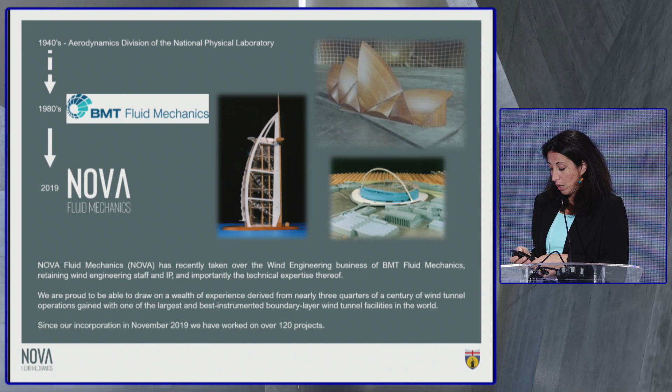...exist, but they deal with other aspects of engineering now. Together with two partners, I am one of the directors of Nova Fluid Mechanics. Since 2019, we have done 120 projects, and many of them are tall towers in Brazil. Hence why it's very important for me to be here today and talk about something that is very relevant to this country. So what do we do at Nova Fluid Mechanics?

Very briefly, we mainly deal with wind loading on civil structures. So all the civil structures that are considered very flexible, that can be tall buildings, long span bridges, stadia. We also work on offshore structures and renewables.

What I'm going to talk about today is wind climate. I'll give you before a brief introduction of why we are doing this research project and how it happens. Wind climate, wind loading in general for tall buildings. And then I will go into specifics of how we derive wind loads of tall buildings when we are in a thunderstorm-dominated region. And then I'll give you an overview of the research projects and what we want to do in the future.

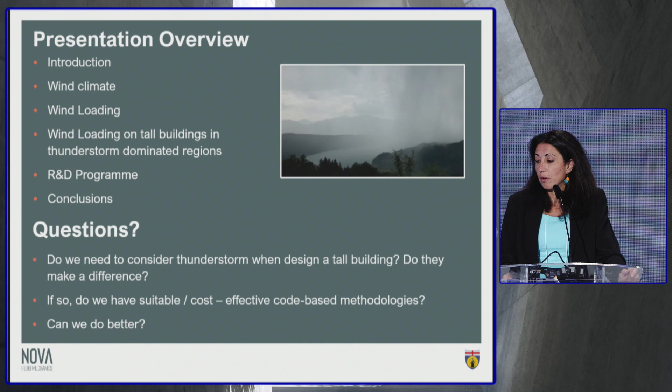This is one of my favorite videos of a thunderstorm, which clearly highlights the complexity and the beauty of this wind phenomenon. What I'm hoping to achieve today is provide you with not definitive answers, but a few things to think about and answer some of the questions. Such as, do we need to consider thunderstorms when we design a tall building? Do they make a difference? And if so, do we have a suitable, cost-effective, code-based methodology to do so? And most importantly, can we do better?

I was very pleased to hear the other presentations today, both Sergio and Roberto, because indirectly or directly, they both mentioned that the codes, the standards that we use as engineers are not necessarily suitable for the world of today's engineering. And it's very important that in the commercial world, obviously not part of a university, we keep on asking ourselves the question, can we do better, and try to work with universities and research centers to improve the ways that we have for designing structures.

So, what is wind engineering? I would like to provide a definition simply because not all the civil structures or concrete structures need detailed wind engineering studies. One of my favorite definitions, by one of the greatest wind engineers to me, Jack Cermak, is that wind engineering is best defined as the rational treatment of the interaction between wind in the atmospheric boundary layer and human beings and their work on the surface of Earth.

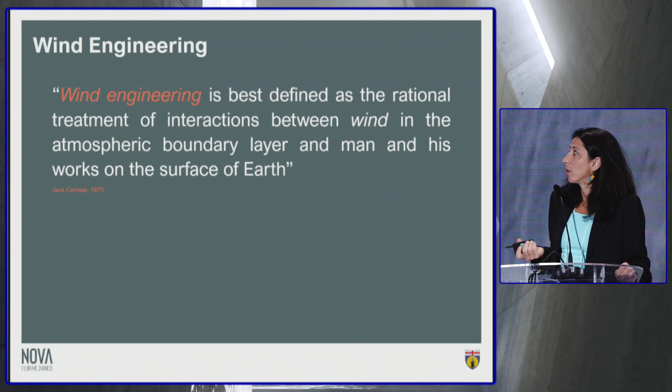But in the case of a civil project, how does wind engineering fit into the design and build of a civil structure? This, you may recognize, is a building in London, which was designed by a South American architect, Rafael Viñoly. I was involved in this project when I worked at BMT. And how does wind engineering fit in the process from an architect's sketch to a complete project? In this case, we worked extremely well. We were part of the team. What I feel is that for the majority of the buildings, the wind engineering specialist is not called to be part of the team soon enough.

Andrea's presentation was really good and really interesting, and he mentioned RWDI, who are doing the wind engineering for this extremely tall tower, because it's a 500 meters plus tower. But it doesn't happen that the wind engineer is involved in the design at a very early stage if we have, for instance, 100 meters tall structures.

And my personal and professional view is that this is somehow a mistake, because the involvement of a specialist could essentially save a lot of money to designers, ultimately to our clients, and we would be able to design better structures, because very small changes in the cross-section or the envelope of a building would be very obvious for wind engineers. Sometimes they are not taken on board, they are not used by architects at early stages of the design.

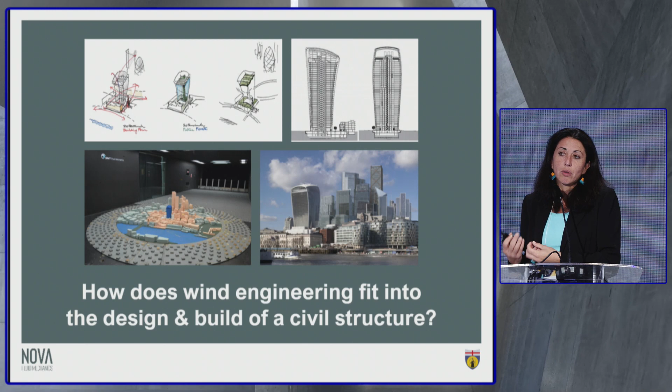And more often than not, when we work as a company on tall building projects, we arrive at a stage where the envelope, the shape of the building, is already defined and no changes can be made. So our service is simply to provide the clients and the structural engineers with the loads, and nothing can be done to reduce or optimize the structures, which is a shame.

But in some cases, when we have synergy, and I believe that the greatest projects result from the effort and the empathy and the synergy between all the people that are involved in the various disciplines. So synergy between project managers, engineers, architects, and contractors is the key to successful projects.

And engineering is driven by many aspects. We are all engineers, I'm sure, of all disciplines that are here today. We know very well the budget is always against us, and the schedule is always against us, and then we have all sorts of other technical issues that we need to worry about. But sometimes when we manage to collaborate with people that share with us the same goals, we manage to also achieve great things.

And I would like to say that the collaboration between Nova Fluid Mechanics, which is my company, the University of Genoa, engineer Sergio Stolovas, and also the client of a building, which I cannot mention now, led to a research project on the relevance of considering thunderstorm events when designing a tall building in a mixed climate region, with the ultimate goal of designing wind-safer, more cost-effective and sustainable tall structures.

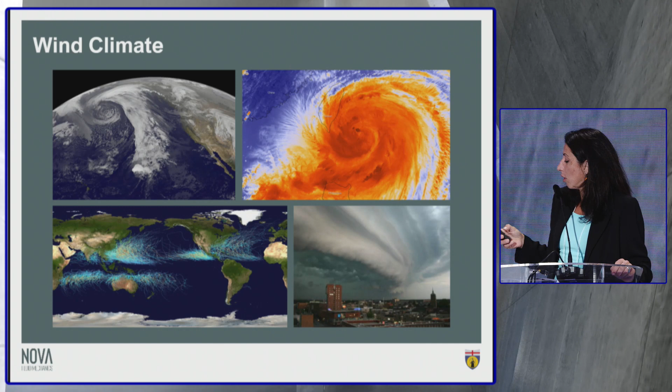There are other types of weather events. This is a thunderstorm, a tornado, this is a shamal wind that occurs in the Middle East, that are somehow considered less important. I mean, tornadoes, not really. There is a lot of research going on about tornadoes nowadays. But for instance, thunderstorms, we are not quite there. The research started very late in the day to me.

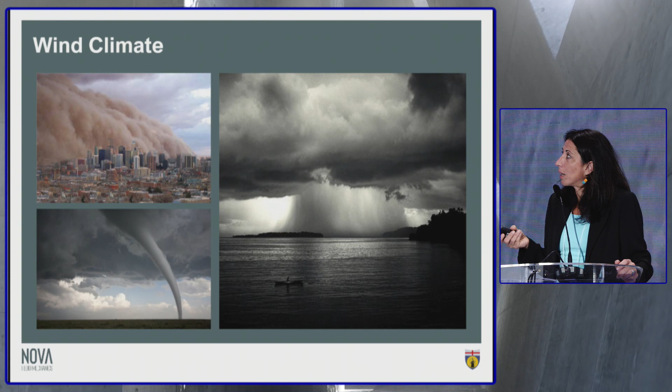They are somehow secondary weather phenomena, and therefore they are not codified very well, or in some cases not codified at all, which is a great problem for us as wind engineers and for structural engineers when we design structures that are affected by tornadoes or these secondary, I wouldn't like to call them secondary, but I don't know how else to define them, weather events.

So why is wind climate so important? This is a slide that I have shown many, many times. I should have added some of the Brazilian towns, but I haven't had the time to do so, but it's self-explanatory. On the x-axis, we have the design pressures, and on the y-axis, the height. And you can see that if you are designing a building in Kuala Lumpur, the design pressures will be more or less around 1 kilopascal.

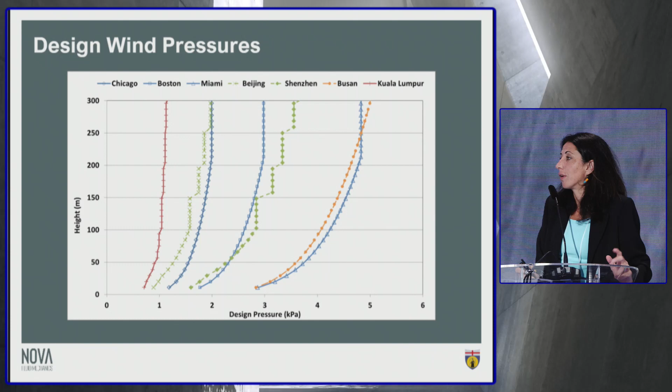But you take the same building, you put it in Miami, which is significantly affected by hurricanes, and the wind pressures will be almost 3-4 times as much. So the structure will be completely different, more costly, and the engineers will have significantly more challenges. What does this mean? If you take two towns, I've picked Shanghai and Jeddah, the same building in Shanghai would have overturning moments at the base, which are key for the foundation and superstructure design, 1.6 times those of Jeddah. Wind-induced accelerations at the top of the building will be almost twice as much.

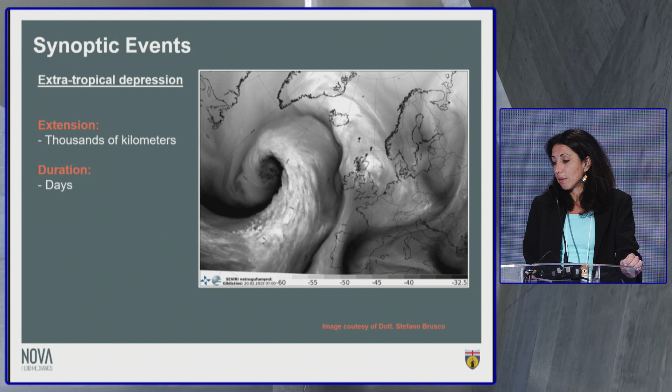But I will now start talking about the weather events that are fundamental for Brazil. Obviously, there are the synoptic events, which are your standard daily winds. They are called extratropical depressions, and arise from differences in temperature between different areas of the Earth's surface. They can extend for thousands of kilometers, and they last for days. What do they look like when we measure a synoptic event? A synoptic event tends to be very stable. We call it a stationary event.

You can see this is the variation of wind speed with time measured by a standard anemometer, and in this space of 10 minutes, the wind speed is pretty much stable, 22.5 if I see very well, and the second graph shows you the wind direction. Wind tends to come always from the same direction. These events can be measured very easily with standard anemometers that are not particularly expensive.

And we have characterized, as engineers, these events very well. The formulas that you can find in the code to extrapolate wind speeds from 10 meters, which is generally what the code provides, up to the top of your towers, are very accurate. And we know that because we compare them with full-scale measurements.

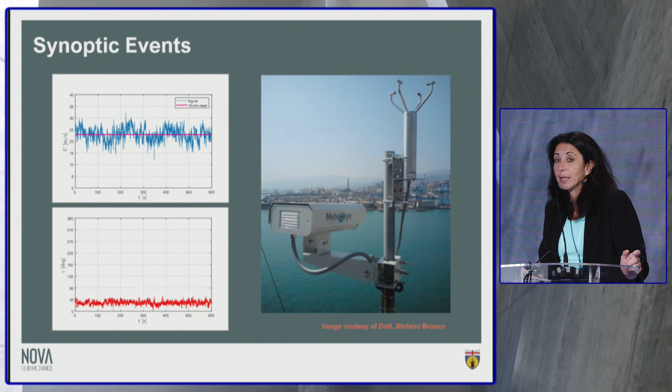Thunderstorms. Thunderstorms are very special and very complex events. If we wanted to draw a thunderstorm, what it looks like is a jet of air that goes from the clouds and hits the ground, and before hitting the ground, moves radially. And the wind speeds in these areas can be very high, extremely high. They can extend from 1 kilometer to a few kilometers or 10 kilometers. They can last minutes or a few hours.

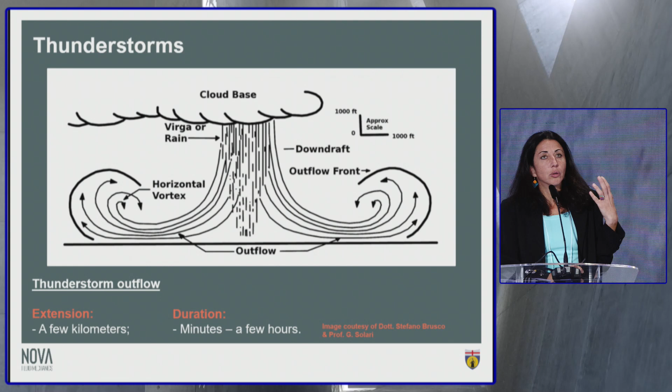And immediately you can understand that this means that they are very difficult to characterize. They are all different. And different means that it's very challenging to find empirical formulae that would allow us to codify the approach to derive wind loading for thunderstorm events on civil structures.

Okay, this is an extreme case. It's a thunderstorm that travels extremely fast, and obviously the wind speeds will be very high, and you can see at the end the trees moving. So thunderstorms are very complex phenomena. Probably the most complex phenomena I had to deal with since the beginning of my career more than 20 years ago. Fujita, who is one of the scientists that studied thunderstorms together with Giovanni Solari, defines the downburst as the downdraft that impacts over Earth's surface and produces intense radial outflows and rings of vortices.

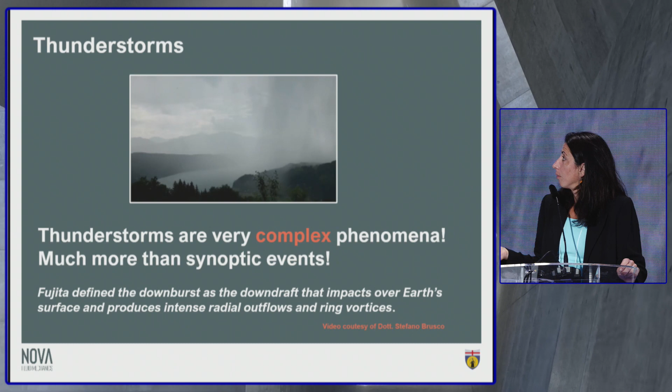Okay, compared to synoptic events, if you remember the previous graphs, you can see it looks very different. This is still variation of wind speed with time. If we measure always at the same point, the wind speed varies significantly, and also the wind angle, the wind direction varies significantly. Can you measure accurately with a standard anemometer? No. It's very difficult. We can assess if we are measuring a thunderstorm or a synoptic event, in some cases, depending on the anemometer.

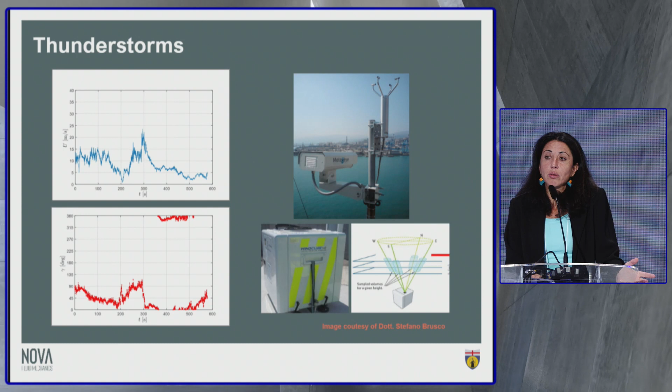But if we want to really characterize a thunderstorm, we need to have one of these anemometers. They are called LiDAR. They are very rare, extremely expensive. One of these would cost $500,000. So you immediately understand that all the universities and research centers now studying this phenomenon need to have a lot of money, because only the anemometer costs a lot of money. I'm not an expert on this type of anemometer, but they don't work very well when it rains, which is a massive problem if you want to study a thunderstorm.

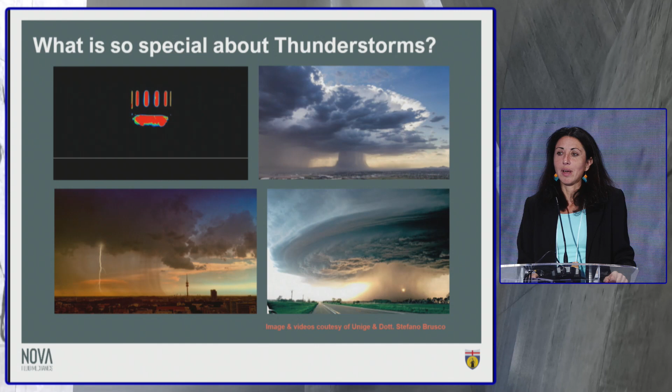Okay, press again. This is a CFD simulation of a thunderstorm. I've put a few pictures because I'd like to answer the question, why are they so special? Because they are all very different. A thunderstorm is something that each one of us has experienced many times in life. I live by the sea, in an area that is not thunderstorm dominated, but we have a lot of thunderstorms, and every time there is a thunderstorm, it always looks different. In the last year I've been looking at thunderstorms with a completely different eye, and I find it very challenging to think that soon we will have a solution on the treatment of wind loading for thunderstorm events.

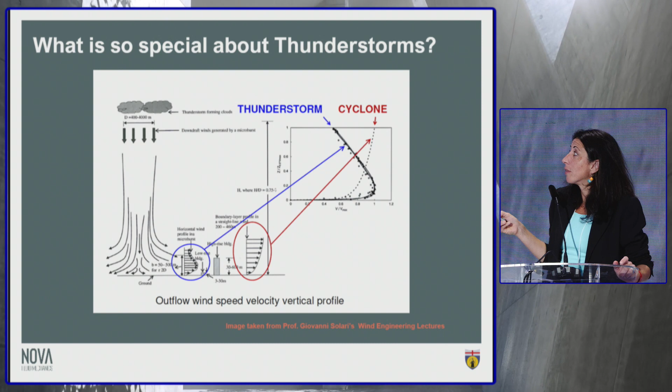What is the difference? Anybody a bit familiar with wind engineering would know that for synoptic events, your standard events, but even for typhoons or hurricanes, this graph is height and wind speed: you increase the height above the ground and your wind speed increases. This is not true for thunderstorms. In thunderstorms, the wind speed increases up to a point, where you start having the vortex, and then it decreases again. This height is mysterious, nobody really knows. There are a lot of formulae based on measurements, but our research, and I'll explain it later, has concluded that we still don't know exactly where this point is. It depends on too many parameters.

Now, are they important for civil structures? This graph shows variation of wind speed on the x-axis, and on the y-axis, variation of height. The red profile is a wind profile of a synoptic event that grows with height, and the blue profile is a typical wind speed profile for a thunderstorm event. You can immediately see that small structures would be very susceptible to thunderstorm events. Very tall structures, like the one Andreas has shown, it's not in the code. You won't find this information in the code. It isn't written that as a designer you can avoid looking at thunderstorms for very tall, super tall or mega tall buildings.

Actually, my view is that you need to worry about it, not necessarily for wind loading, but you would have to worry about it for cladding design, for the glazing, because the wind speeds could be higher than those for a synoptic event. For small structures, we know that they are a problem because these structures collapse, and they collapse due to thunderstorms.

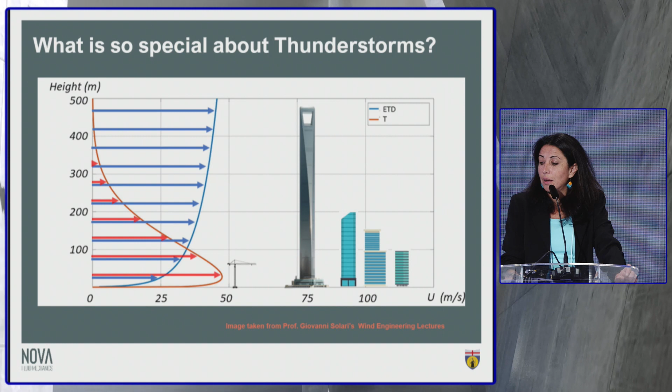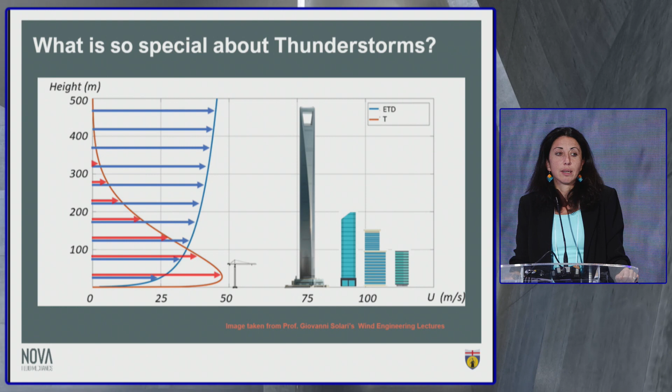But what I'd like to focus on today is what happens when we have structures that are between 100 meters to 200 or 300 meters. Maybe at 300 we are already out of the range, but the 200 meters. And these are the structures that are being built in Brazil at the moment. Many of the tall buildings in Balneário Camboriú, only a few are up to 300 meters, and the majority is below this height. So it's important that we understand this, because in Brazil, you have many areas that are dominated by thunderstorms.

There is a great website, if somebody is interested I can give you the name, that shows the lightning. Lightning is always associated with thunderstorms. It shows the lightning for almost any area in the world, and the variation of lightning with time. So we knew the time at which the structure collapsed, and I spent hours and hours looking at the lightning nearby, and eventually found that the collapse was due to a thunderstorm.

Why did it collapse? Because the code does not describe very well how you can design for thunderstorm events. Our codes, and I mean all the codes that we have as structural engineers, focus only on synoptic events. Now, we don't have the same record for tall buildings. I haven't been able to find a record of a single tall building that failed or had significant damage due to a thunderstorm event. However, I have found records of glazing systems and facades being damaged by thunderstorms.

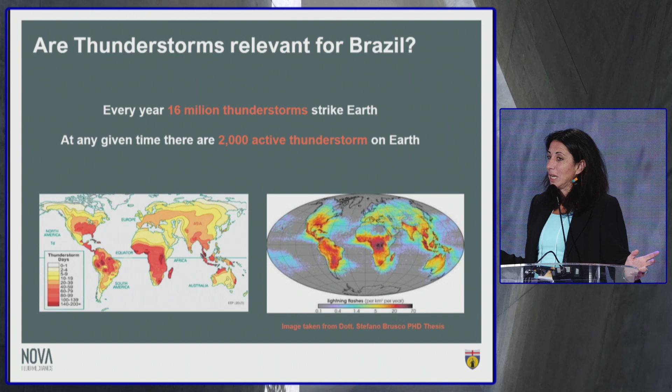Now, are they relevant for Brazil? Every year, and this is a number that really amazes me, there are 16 million thunderstorms on Earth. And at any given time, there are about 2,000 thunderstorms occurring. These two graphs answer the question. Yes, this map shows the lightning flashes per square kilometer per year, and you can see that South America is all very red, so many lightnings. Same here with the number of thunderstorms per year: Brazil is significantly affected by thunderstorms. So they are important, and we need to consider them in design, both for small structures and tall structures.

As a company, we have done a lot of work in Brazil. This is the map of Brazil's wind speed taken from NBR, and I have highlighted in red the areas that I know are either dominated by thunderstorms or where the climate can be considered mixed, so that synoptic events and thunderstorms are somehow equally important.

How do I know about those red dots? Because when we work on a tall building or other civil structures, obviously we use the code, but we also do a specialist wind climate study. We take the data from several of the nearest airports to our site, and we do a statistical analysis of the data gathered from the anemometers. Via this statistical analysis, we are able to assess if the climate of a particular area is affected by thunderstorm events or not, and we derive site-specific design wind speeds.

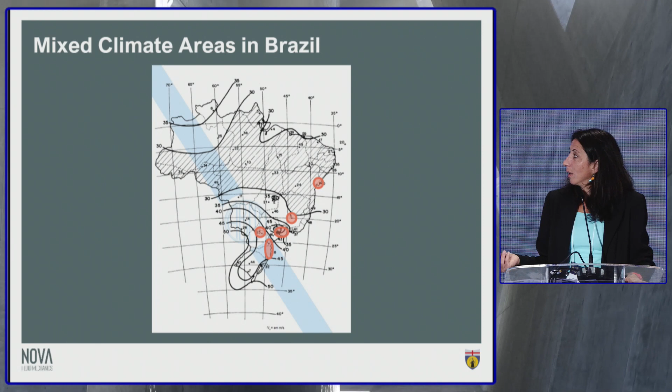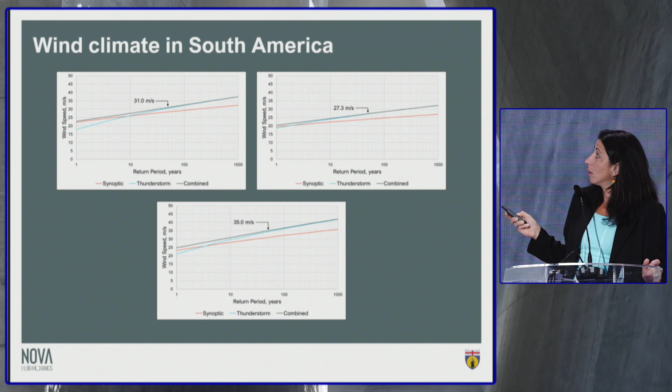This is what I mean when I say thunderstorm-dominated climate. All these graphs show return period, normally 50 years for buildings, versus wind speed. You have three types of curves: synoptic, thunderstorm, and combined. Combined is what we design for. And you can see that in these three areas, which are all in Brazil, the synoptic events, the orange line, have 50-year wind speeds that are significantly lower.

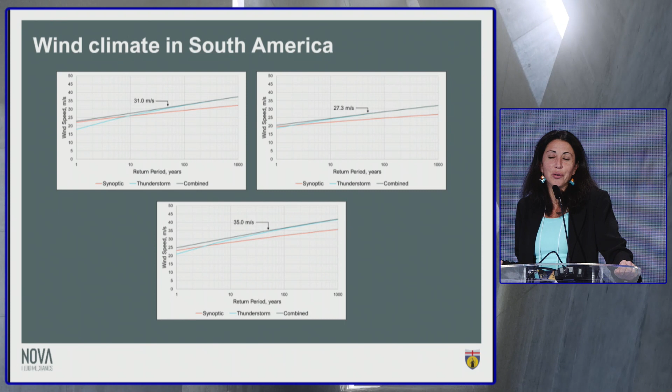What does it mean? It means that if I could give you the answer that thunderstorm events are not important for tall buildings, designers could take advantage of this and design for much lower wind speeds. Therefore buildings would be less expensive, with fewer columns and more space for the occupants, so the advantages are infinite.

Now, can we not as engineers simply design against thunderstorms? No, I said it already. Here there are several codes. This is the Eurocode. Okay. Eurocode, American code, Brazilian code, some pretty pictures showing wind pressures on tall buildings. No, you don't find this answer in the code.

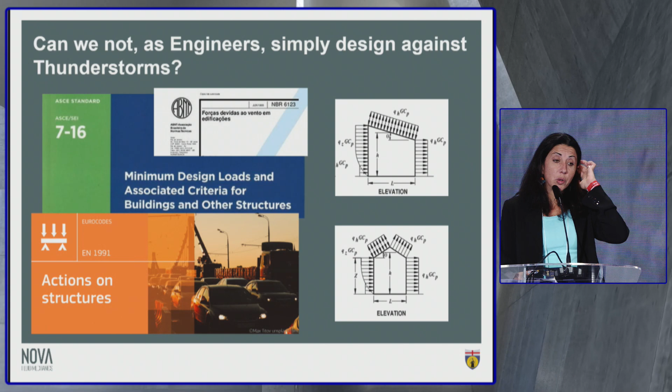They are barely mentioned. In some codes thunderstorms are not even mentioned at all, as if they weren't important. I'd like to say again, for tall buildings it is debatable, but for small structures it is a real problem. And that's why Giovanni Solari received so much money from the European community to do the research, because these structures were collapsing, small structures.

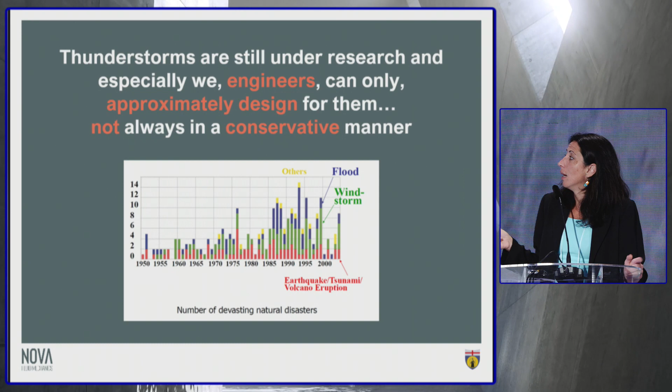Now, wind is important. This graph I particularly like shows the number of natural disasters on Earth. I'm sorry, it's not up to date, it's only up to 2005. But you can see the green lines are the wind storms, then you have earthquake, flooding, and others. Wind is very important. So when we design, we need to pay a lot of attention to the wind engineering aspect. And not knowing how to treat thunderstorms means that these natural disasters could cause damage to our structures.

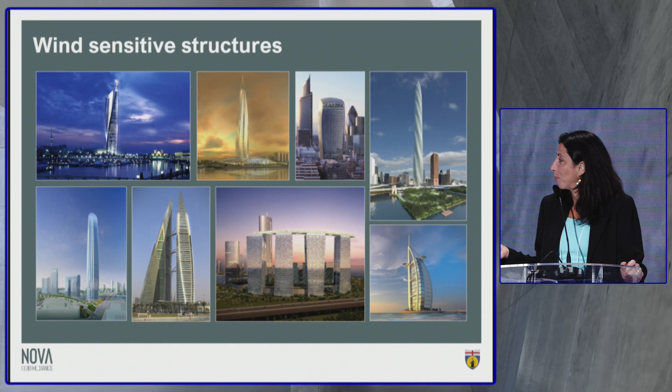So wind loading on tall buildings. Everybody else has already defined what a tall building is, but generally we are talking structures above 300 meters. These are some examples, obviously. How do we design them? How do we assess the wind loads? We can start with codes of practice. Any structural engineer would not, as soon as they start a project, call the wind engineer. They would always do some preliminary calculation with the codes.

There are also design guides and handbooks, obviously boundary layer wind tunnel studies. I wanted to be extremely politically correct, and I put numerical simulations, but I would never use a numerical simulation to assess the wind loading on a building. Not now. So the tool is that of wind tunnel testing. Why do we do wind tunnel testing?

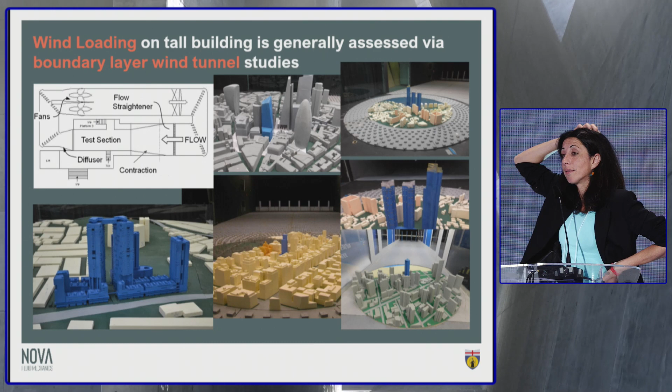For several reasons. Obviously, the code is not applicable, and in most cases it is written exactly in the code, for structures that are above 200 meters because they are too flexible. But also, the code is not applicable when you have very complex shapes. The code is a set of rules, empirical formulas that have been derived for simple shapes: square, rectangular, triangular, or circular cross-sections. But when you start having very complicated architectures, you cannot expect that the code would provide you with very precise wind loading. It's a problem for cost because you don't want to over-design, but also it would be a very approximate way of doing so.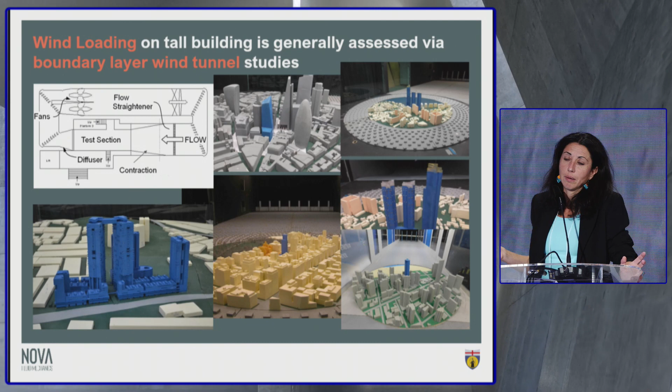The effect of the surround: we test also to assess the effect of the surrounding buildings on our towers. It's called shielding, so you have your tall tower and it would be shielded by a lot of other towers. It's not always a shield. Sometimes buildings protect each other, but in other cases the wind arrives, hits the first building, then a lot of turbulence is generated, and the loading on your building might actually be worse.

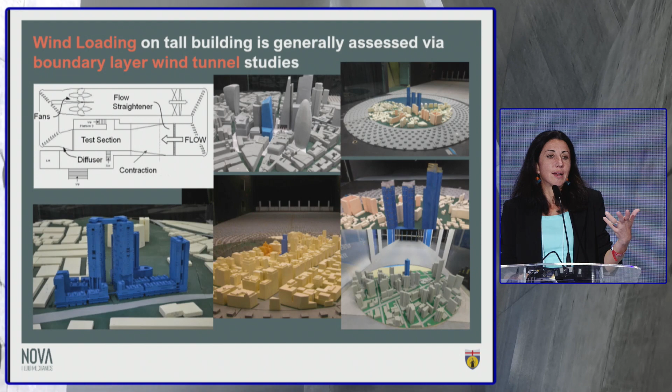Very often we study buildings in the existing surround, so what is expected to be the surround at the moment of the wind tunnel test, but also in the future surround, because we want to understand the impact of new developments.

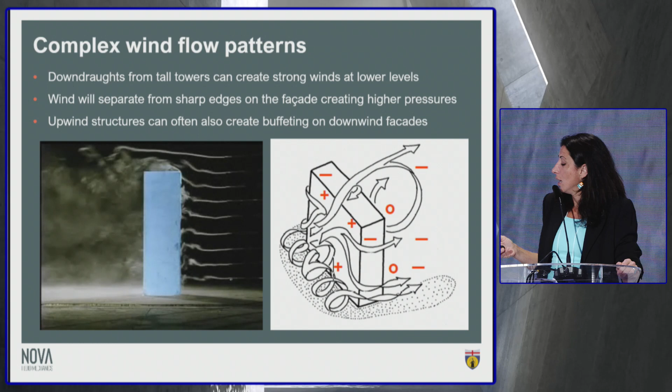This is to show the complexity of the flow. This video I really like. Again, it's a very old video as well. The shape is rectangular, and it's flow visualization that we do in the tunnel with some sort of smoke. But you can see, in this area, how complex the flow is. And this is one of the reasons that CFD or numerical simulations don't work very well, and empirical methods or calculations wouldn't work well either, because it's too complex.

How do we measure wind loading on tall buildings? There are several methodologies, but this one is one of my favorite because, as we say in English, it kills two birds with one stone. It's simultaneous pressure integration. You take a model, this is probably a 1 to 300 model of a tall building. It's generally 3D printed for maximum accuracy, and then it is instrumented with pressure sensors.

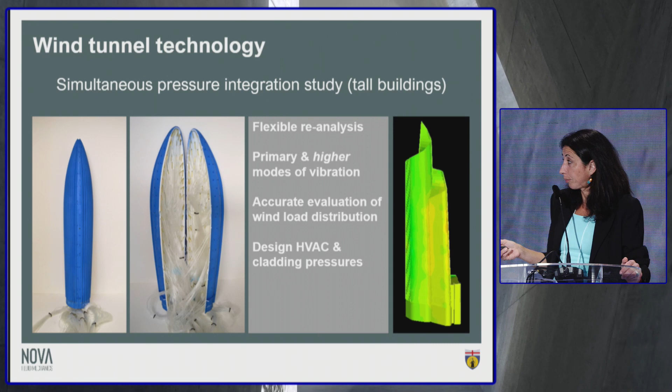Depending on the size of the building, it could be between 200 and even 1,000 pressure sensors for extremely tall, or mega tall, buildings. Each pressure sensor measures the pressures, and from pressure integration we derive the overall wind loads applicable to the design of the foundation system, and the floor-by-floor loads applicable to the design of the superstructure. In terms of wind loading, which is the topic of